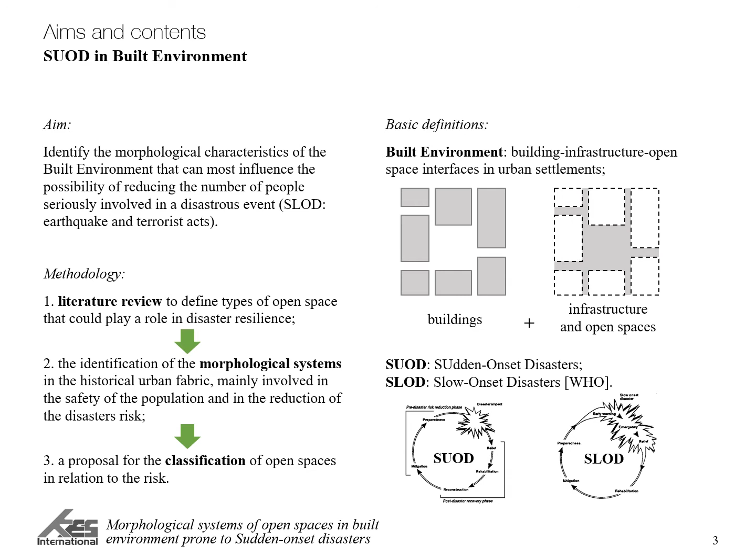This research is structured in three parts. Literature review to define type of open space that could play a role in disaster resilience, the identification of the morphological system in the historical urban fabric mainly involved in the safety of the population and in the reduction of disaster risk, a proposal for classification of open spaces in relation of the risk.

The effect of sudden onset disasters is influenced by the characteristic of the built environment and the user presence, especially while referring to the historical urban areas that are characterized by a variety of complex factors, such as population density, construction techniques, and morphological configuration of the open spaces.

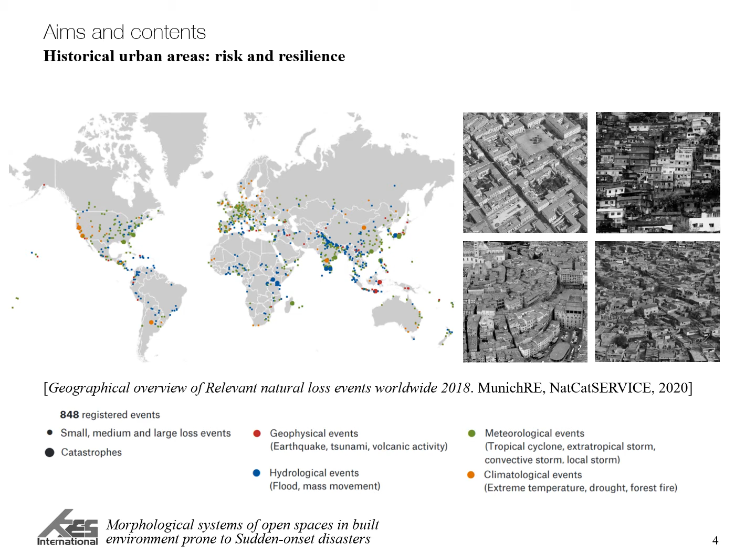In this framework, the morphology of the built environment is therefore a critical factor for evaluating the resilience of urban settlement. In the literature, the morphology of the built environment has been studied from different points of view. From a spatial analytical point of view, we can find in literature the approach followed by Lynch, Batty and Hillier.

Among them, Lynch identifies 6 distinct aspects to define the built environment form in urban area: physical form, use activity movement, control, perception, continuity change, movement or flow of material and information.

The typological approach to urban morphology is rooted in the work of Muratori, Caniggia and Maffei. They studied the built environment focusing on its structure and on the historical process of its development.

Finally, the historical geographical approach to urban morphology is well summarized by the work of Conzen. His town plan analysis considers 5 aspects: site, function, townscape, social and economic context, and development. It distinguishes 3 form complexes: street system, street block, and block plans.

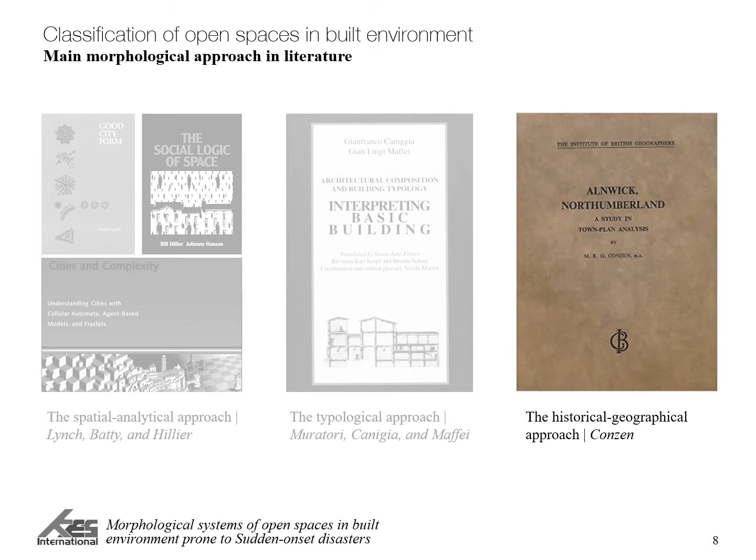The link between these different approaches highlights at least 4 main aspects: spatial relationship of physical features, interrelation between human and physical features, flows, formation, transformation, cyclical change.

In this literature framework, the research aims to propose an updated classification of built environment, starting from a preliminary identification of 2 main morphological systems: areal spaces and linear spaces.

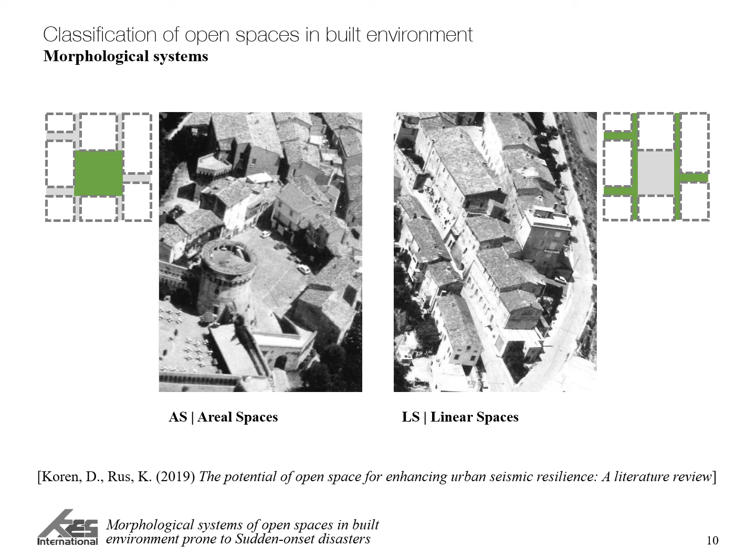Areal spaces are defined as open spaces of public use enclosed partially or completely by constructions, located at the intersection of streets or along main roads, with various urban functions. Squares, parks and parking are examples of areal spaces.

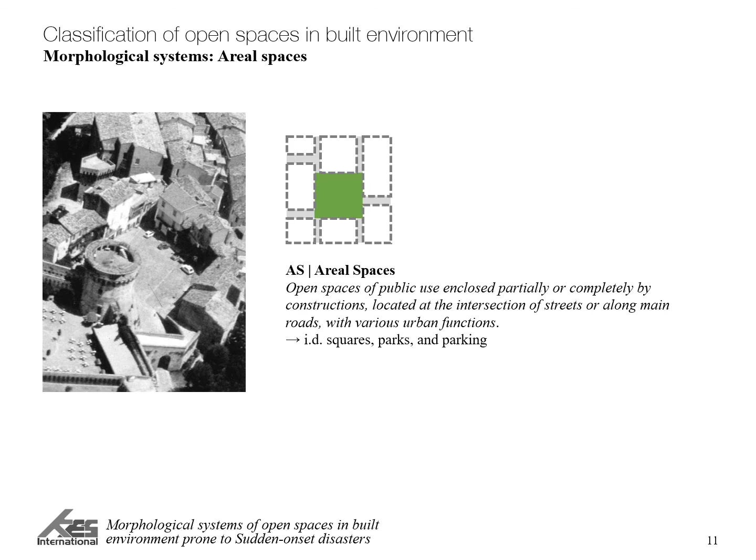A significant research about typological analysis of squares was conducted by Mandolesi and Ferrero that studied and classified all the 165 squares of the Italian area of Piceno, grouping them in 12 main spatial types.

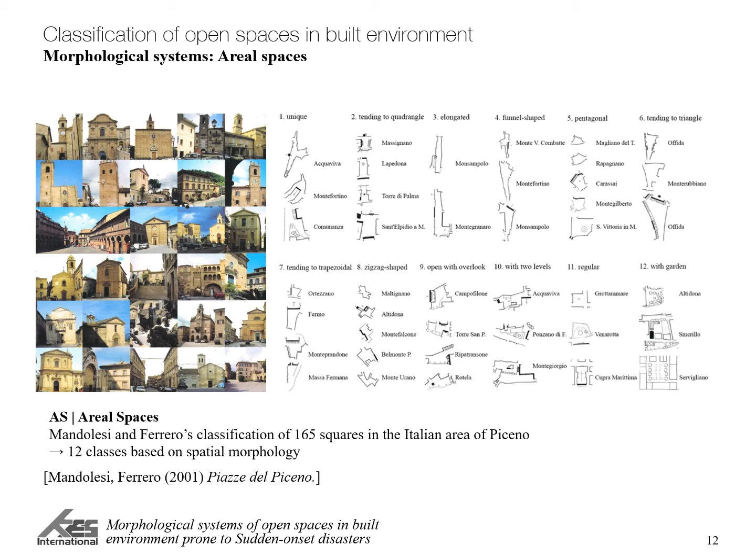Linear spaces are defined as open spaces of public use composing the link in the urban fabric, where people and vehicles can move, equipped with roadbed and flooring. Streets, roads and paths are examples of linear spaces, linking areal spaces and forming the urban network.

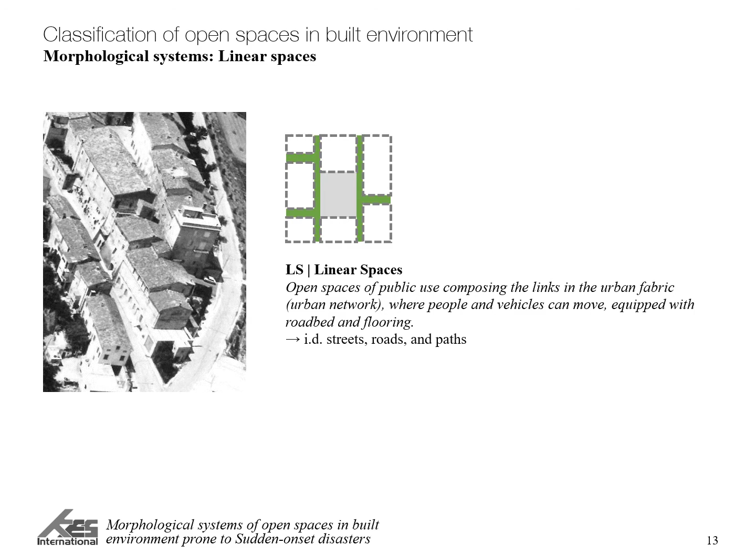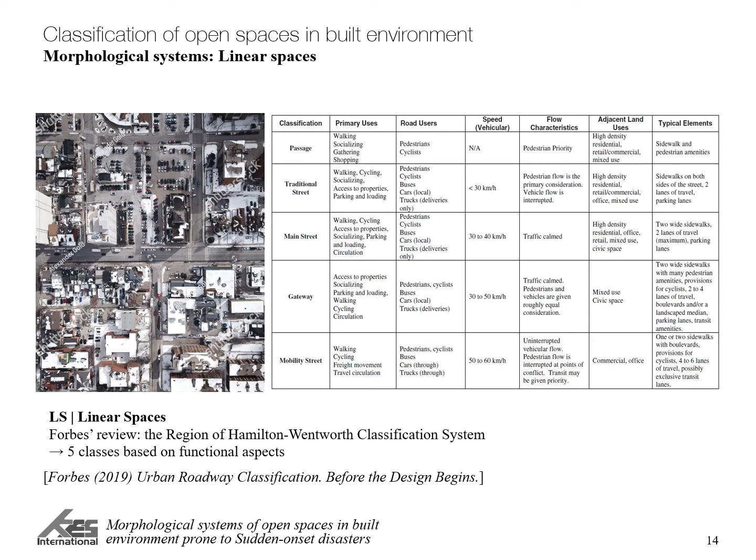Comparing different classifications of roads found in literature based on morphological and functional aspects, the authors consider the Region of Hamilton-Wentworth classification system as the most suitable classification for the European urban context of historical cities and for the global aims of the research project. This classification system is the result of a wide transportation study and reported 5 types of linear spaces: passage, traditional street, main street, gateway and mobility street.

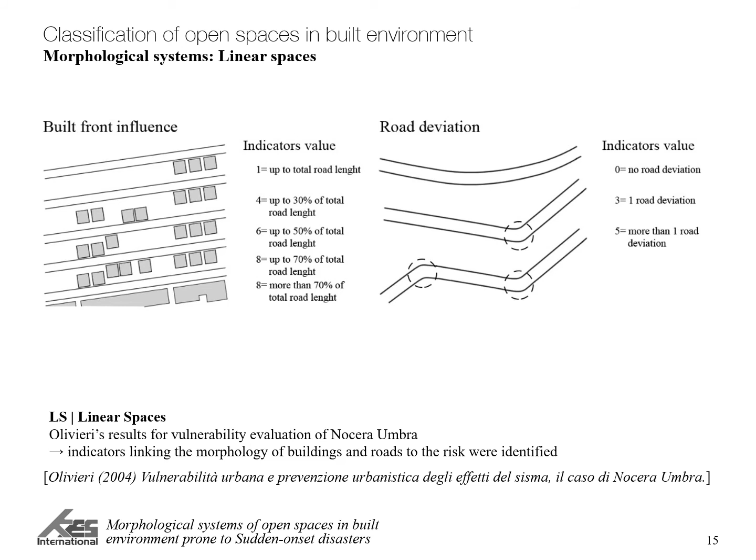In literature, it is also possible to find some research that links the morphological approach with the vulnerability of a historical urban area. Among them, Olivieri has identified several indicators related to buildings and roads morphology for the vulnerability assessment of Nocera Umbra. As a result of this research, the authors have accomplished a morphological classification of both areal spaces and linear spaces in relation to sudden onset disaster risk.

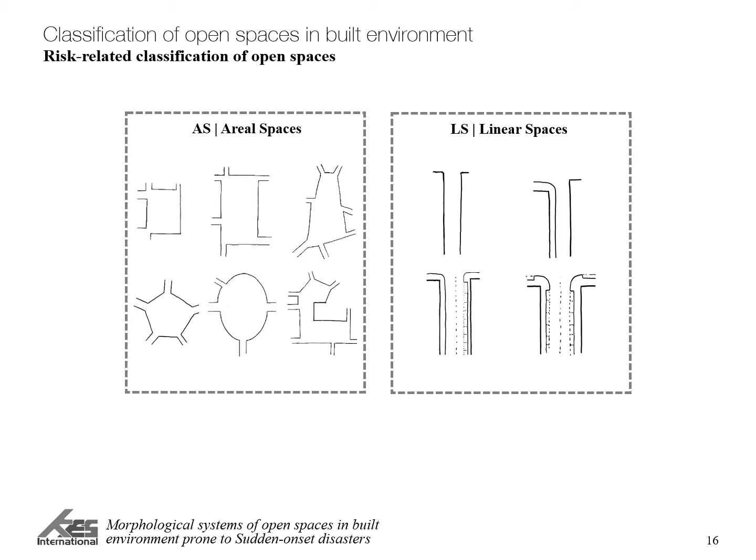For the areal spaces, 6 main categories were identified, comparing the classification of the analyzed literature with the criteria for expedited evaluation of urban vulnerability and emergency limit condition and escape route assessment. The tending to quadrangle category has no prevalent dimension in the planimetric development. The effect is the proximity of people to the emergency escape routes. For this reason, we consider the tending to quadrangle and the regular shapes of Mandolesi's classification in only one category.

The elongated with parallel sides group has a prevalent dimension in the planimetric development and sides that can be considered parallel. There is no constant distance between people in the square and escape routes. The tending to triangular and funnel-shaped class has the problem of the funnel effect that could lead to the concentration of the people in the direction of narrowing. For this reason, we consider both the triangular and the funnel-shaped of Mandolesi's classification in this category.

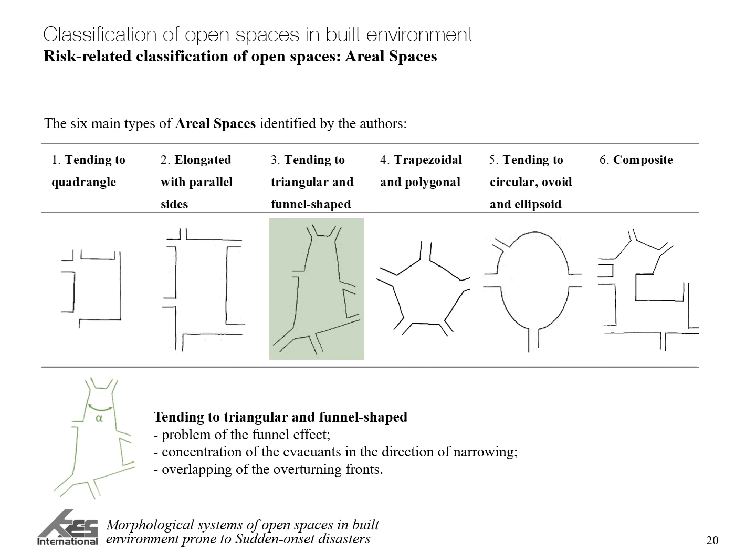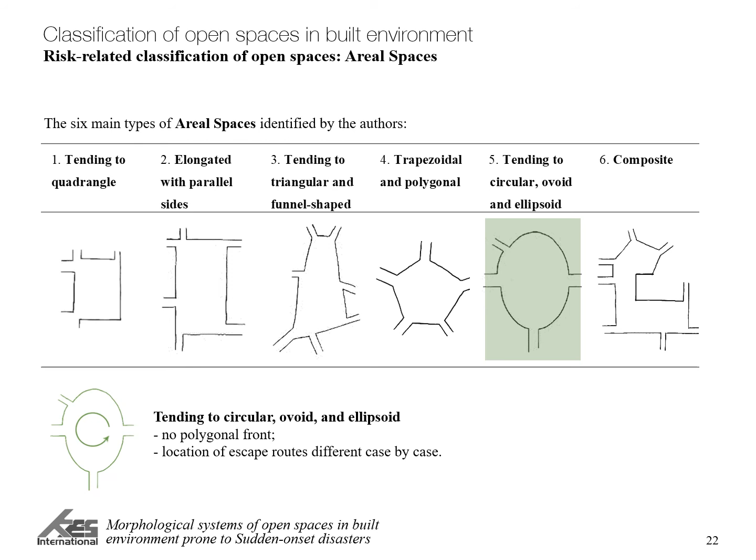Additionally, this morphological type has the problem of the overlapping of the overturning fronts, where there is the acute angle in the plan. The trapezoidal and polygonal group represents particularly articulated spaces with a centric conformation in which we can have a multitude of escape routes. The tending to circular, ovoid and ellipsoid category has no polygonal fronts, and the location of escape routes can be different case by case. Finally, the last class, the composite one, is characterized by a complex shape composed by the combination of the previous types.

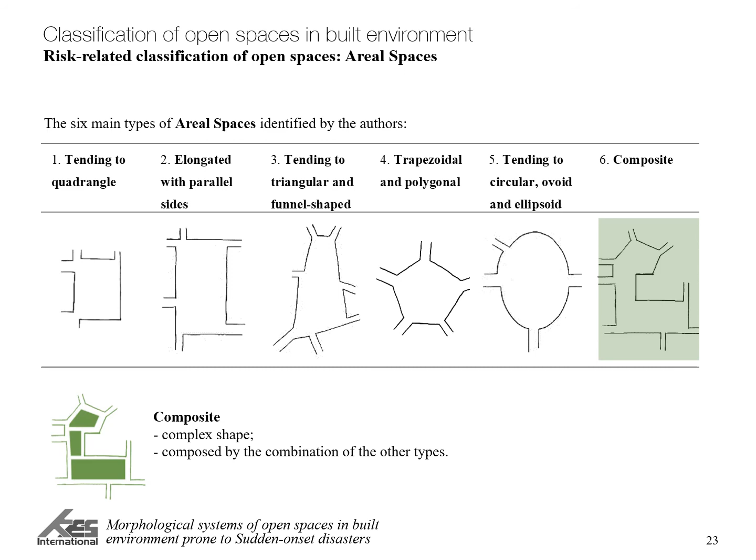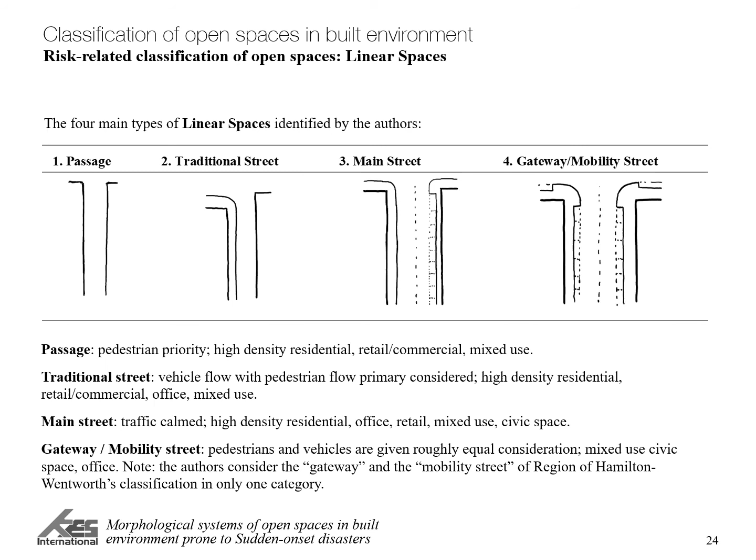For the linear spaces, 4 main categories were identified, starting primarily from the Region of Hamilton-Wentworth classification and its definitions, but considering the gateway and the mobility streets as only one category. The proposed classification is specifically related to the built environment of historical towns and includes the passage, the traditional street, the main street, and the gateway mobility street. The morphotypological characteristics of linear spaces are strictly related to the crowding level.

Considering the seismic events, the dimension of the streets, their geometric features, and the presence of obstacles along them have an impact on the capacity of the escape route. Considering the terroristic attacks, also relevant are the type of crowding and the special uses of the buildings along the open spaces. According with the principle of the maximization of the disastrous effects, it is essential to evaluate the risk in terms of loss of lives and media relevance of the attack. For this reason, the classification of the linear spaces was mainly influenced by the relationship between users, geometry of the open spaces and their use.

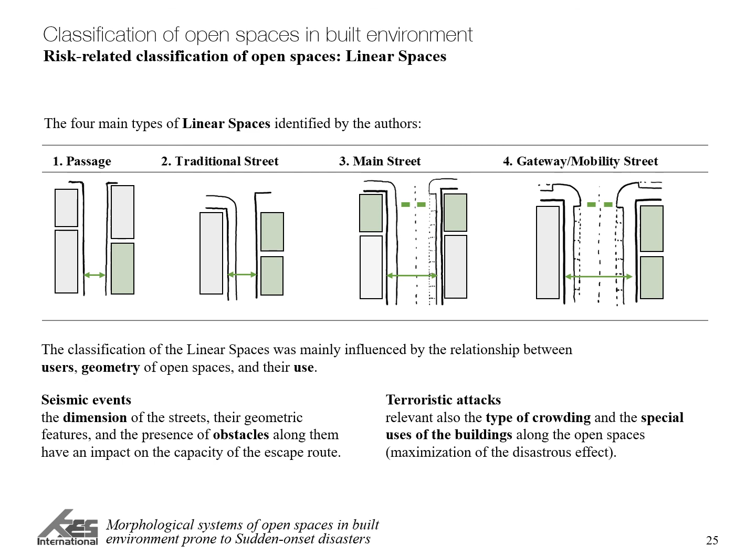In conclusion, the classification of the built environment proposed by the authors highlights how the morphological features of open spaces in built environment affect the performance of the overall system in terms of seismic and terroristic risk. It considers and illustrates the different characteristics of areal spaces and linear spaces in relation to safety and evacuation, and contributes to the evaluation of the security level of the historical urban areas common to Italian and European context.